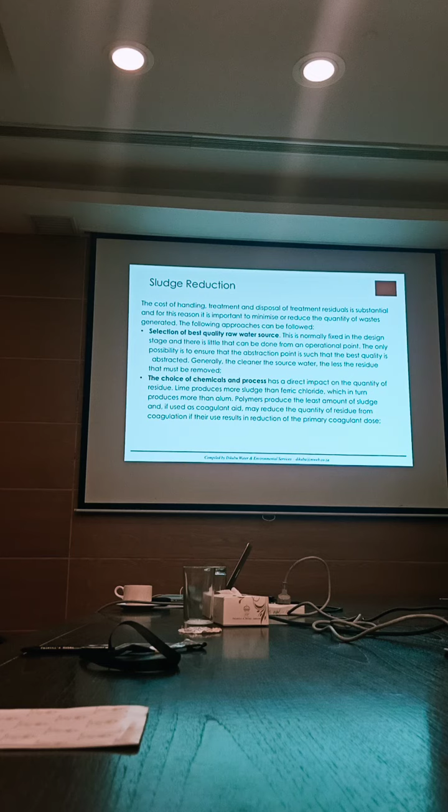Here's our water treatment processes, as many as we need, depending on the quality of the incoming water and the quality required out. So you check the quality of this, the quality of that, then you can select this. That could mean just one block, or it could mean a whole lot of different blocks. Then you start optimizing, saying if this is sedimentation, this is filtration, and let's call this disinfection, just to be standard, and this is flocculation.

What chemical are we adding there? Aluminium and polymer. Do your jar test.

Do we need to add both? It'll depend on this, it'll depend on that. Yes, it's going to depend on cost for that.

So you've seen how it all connects. Your water's got a certain pH, and you need to know what that is - it depends, I can't tell you what it is. Your floc has got a certain pH that it operates in, so that and that have got to be the same. If they're not the same, you must add pH correction. That pH correction is only making sure that this water and this chemical are at the right conditions to be able to work properly together.

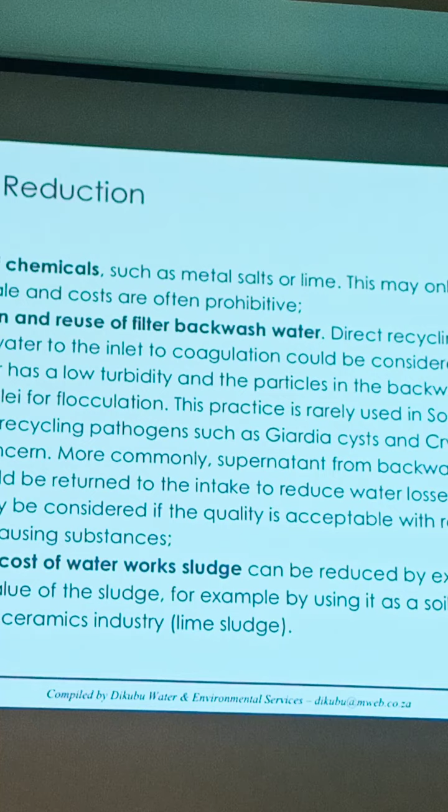Recirculation and reuse of filter backwash water. We can appreciate that some of these processes make a lot of water in their solids disposal - backwash water is a classic example. So let's put that into another settling dam, take the water and put that back into the water recycle, and then concentrate the sludge, taking the water out of the sludge.

I just want to go back to my slides. Don't panic when you see the number of slides, we'll get to them.

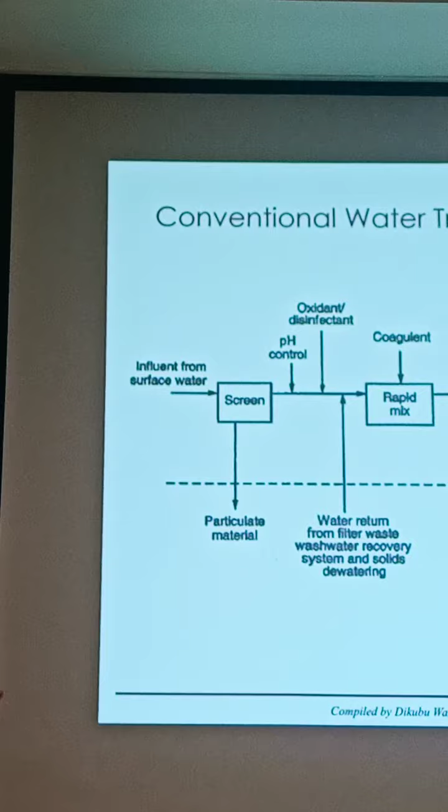So in any water treatment process, you want to consider these: water return from filter waste, wash water recovery system, and solids dewatering. You're not going to throw that water away, you want to put it back into your process. Any filter waste, wash water, under drainage water, solids to dewatering there, that water we must put back into the process. We're going to reduce that.

And that's what you want to do. We want to thicken that up.

And this water, where does it mainly go? Should we put it in the influent, or any process we can put it before the coagulation? So it depends, it's an on-site thing. Why am I saying it depends? Because this water might have coagulant in it already. So be careful. Let's go and do it.

Now you take this water that's got flocculant in it, you squeeze out the water, and you take that water with the flocculant and put it back in here, and you add in flocculant there. Now you might be adding too much flocculant, and therefore your flocculation process is failing. Understand that, so we can reduce that. We are adding in the biological tanks now flocculants, so that might be chemical enhanced precipitation that you're doing in biology. We'll talk about that later.

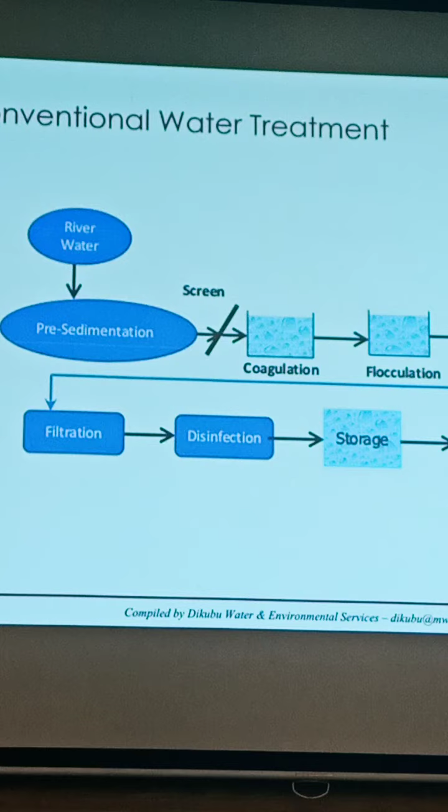There's now pre-sedimentation here, so there might be pre-sedimentation tanks, these ones. Because this underflow has got flocculant in it, put it into here, it will help settling there, and then you have a better quality water coming out of here, which means less chemical added. Or you might want to take that settled water and put it back here, or dewater it and put it back in here, then reduce that as well, because it will have some in it, etc. It's the same with this.

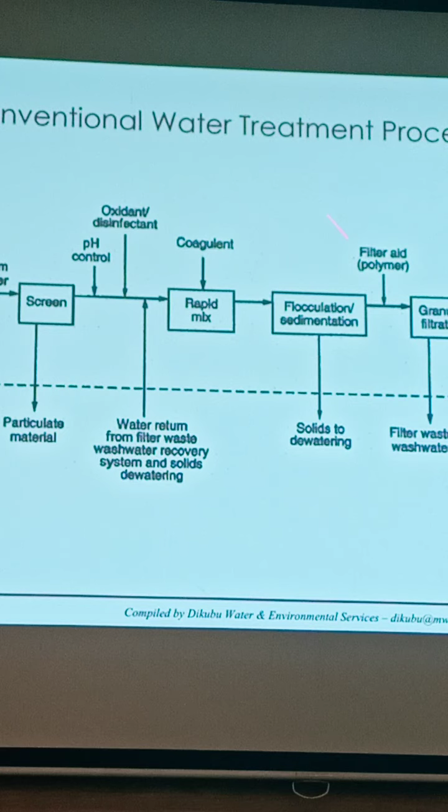Oxidant, disinfectant, what does that mean? We're talking water treatment now. You guys have got me onto water treatment. Ozonation, but what is that for? Is that for disinfection? Because look here, there's disinfection as well. Ozonation, we can use ozone there, we can use chlorine there, we can use UV.

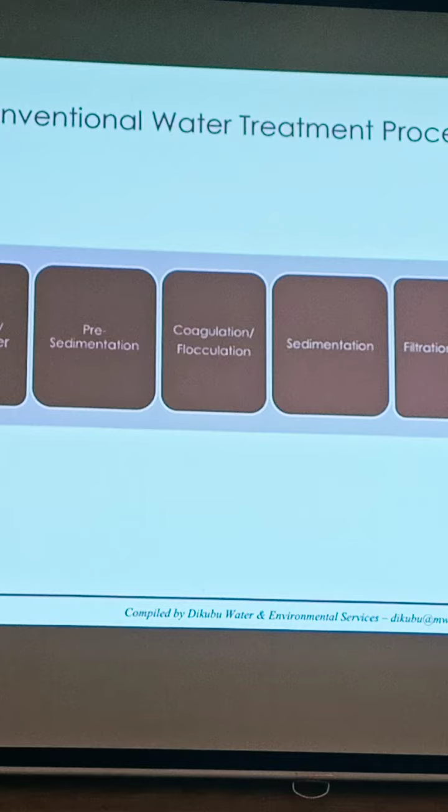Why do we have it here, and why do we have it here? Think about it, give me an answer tomorrow. Because we're not doing water treatment. So we stop, answer that one, we'll go to the next one. Aeration? Yeah, why? Why do you want to aerate? In the equalization tank, we are using aeration after screening.

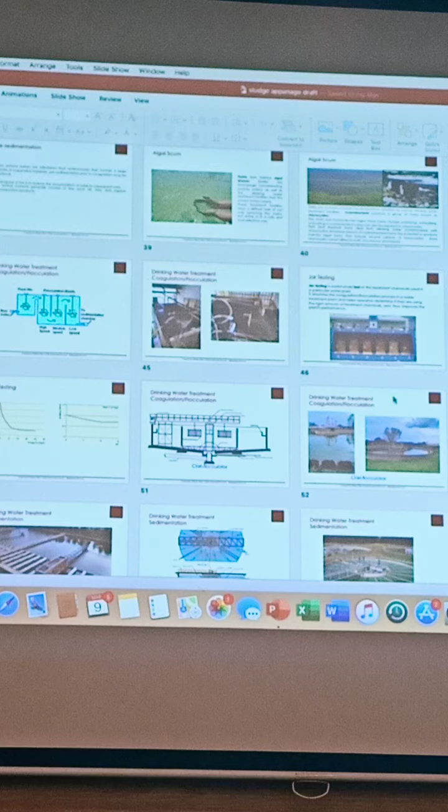You're getting stuck on your biological process. This is not biological process. Okay, but so why on this one?

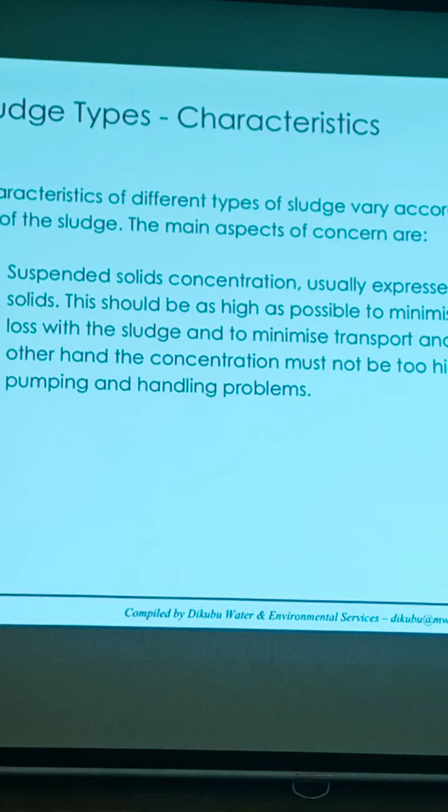Chlorine is used for precipitation of iron. Yes, in the first step we make it insoluble. So now I'll tell you tomorrow, let's carry on, think about it some more.

Obviously, we want to take it to agriculture as one of the best options. In most countries, and Pakistan has got big agriculture as well, what you want to do is support the farmers, or support agriculture with their interface with the soil and crops that they're growing. But we water practitioners, remember, be careful.

Because someone with the same knowledge we've got with water must have the same knowledge with the soil. So we need soil scientists. And then we need someone who understands the crops. Roses against sugarcane against whatever else we grow behave differently, have different uptake of different nutrients and metals. So you need a plant specialist as well. These guys we call agronomists should become quite key in our sector when it starts looking at things like this.

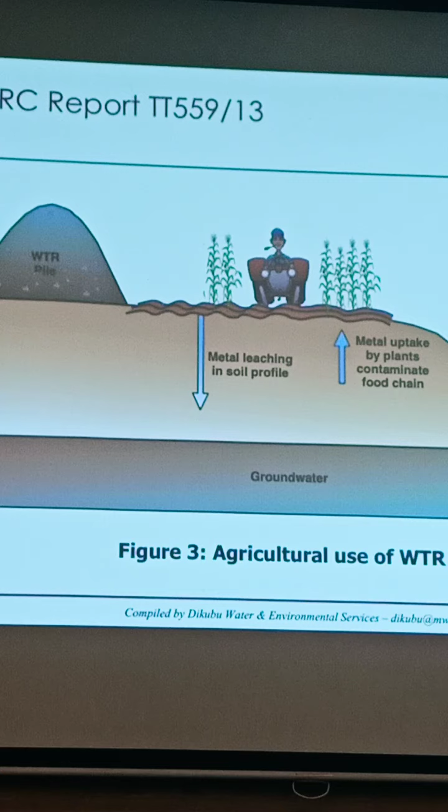So it's not just for farming, for crops. We can go into forestation, where there's growing of forest to get timber, etc. The same concept applies for land reclamation, for landfill sites and mine dumps. Ash dumps might need to be clad as your final process. You can take your sludge, if it's the right quality, and cover your dump.

In South Africa now it's legislation that no mining operation will get a closure unless they've done this. They force the mining operation to excavate the topsoil and stockpile it, then dig their hole in the ground to get to their diamonds or gold or whatever they're after. The material they dig out that's waste, they throw to one side, then they process the rest that's got the ore in it. The material that's now been processed and the ore's been removed is also waste, and those waste piles need to be vegetated before they get closure.

They actually force those companies now to contribute towards a fund, a closure fund. They do the same in our power generation sector, and they should do it in textiles too, but those are still too small, because we're talking big dumps. And there's very little responsibility at the end of the day, so people have been able to walk away from it. It's a big problem.

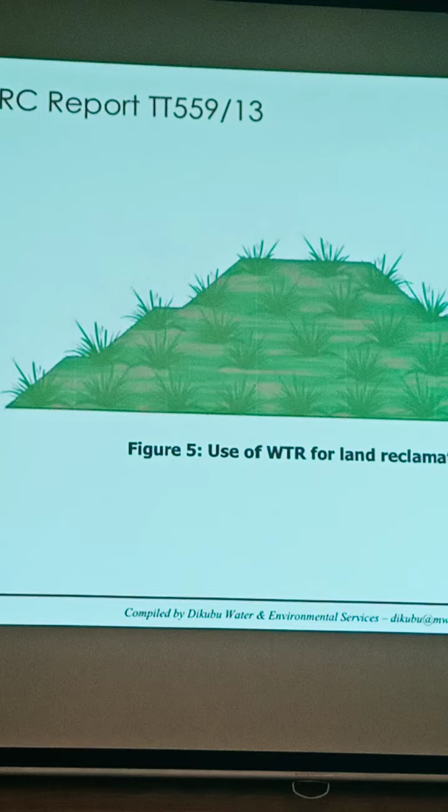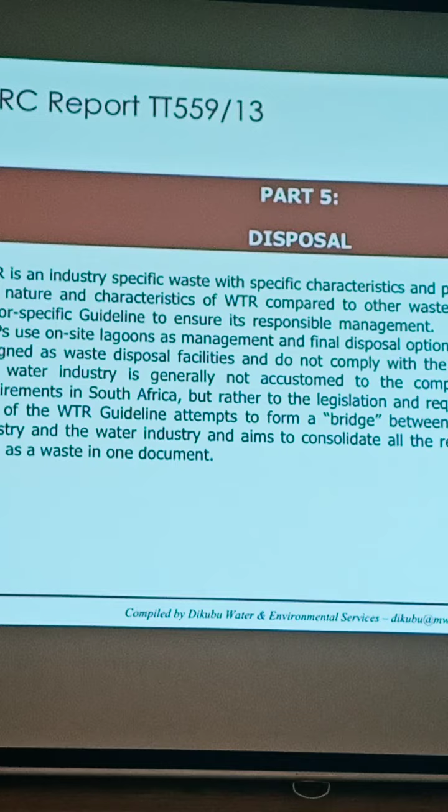Even it's coming to hotels now. Tourists are saying, what are you doing with your waste here at this hotel? And the hotel next door, you're doing that? Okay, we like that, we'll go to that hotel rather. It's fact.

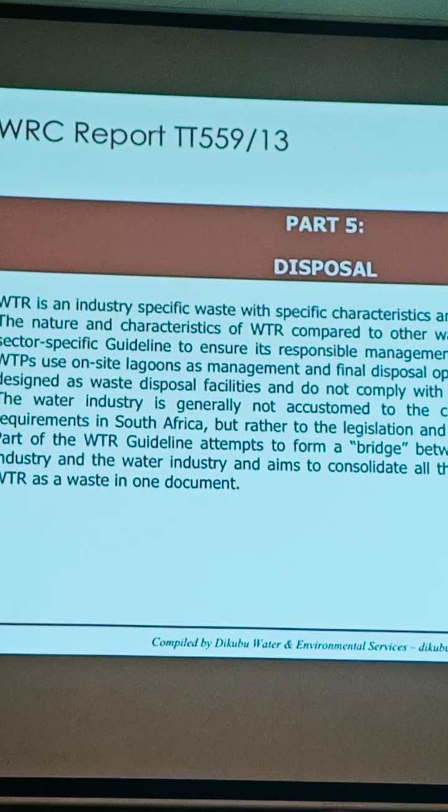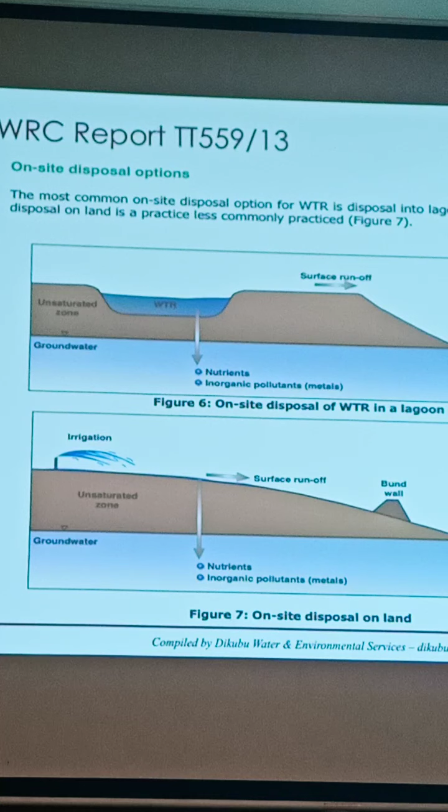And so disposal options need to be addressed. Again, you'll see there's that common underlying theme in terms of the pollution potential, groundwater, surface water, and the requirement to start putting in lining for that, because it starts getting expensive to put in lining as well. So it starts driving you to start reducing the volume of waste that you want to dispose of.

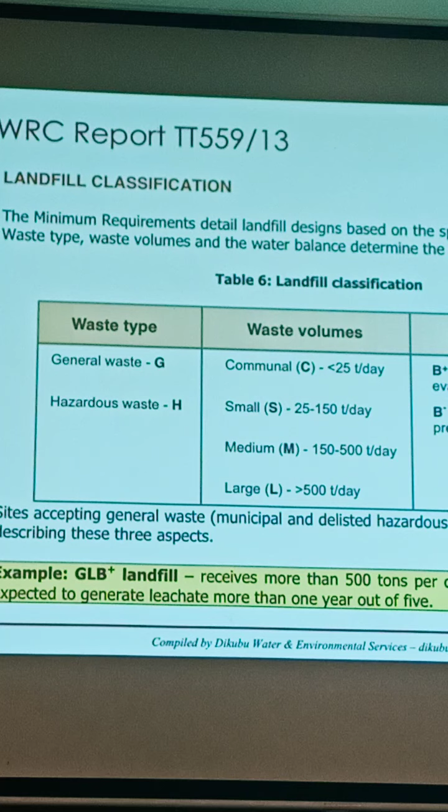Off-site disposal to a landfill, you now need to categorize it - certain types of waste have certain categorizations, and it's fairly consistent all over the world in terms of these broad categories. This is just a reference to some of it. So you would be charged according to what you want to dispose of - if your material has a higher solids content, you'd pay less, etc.

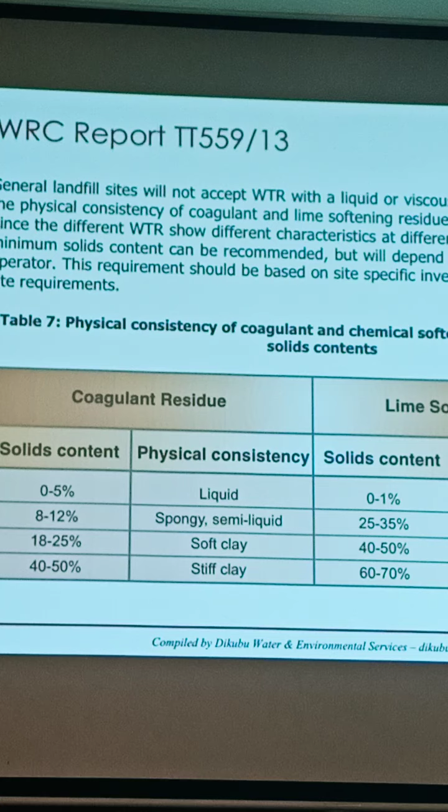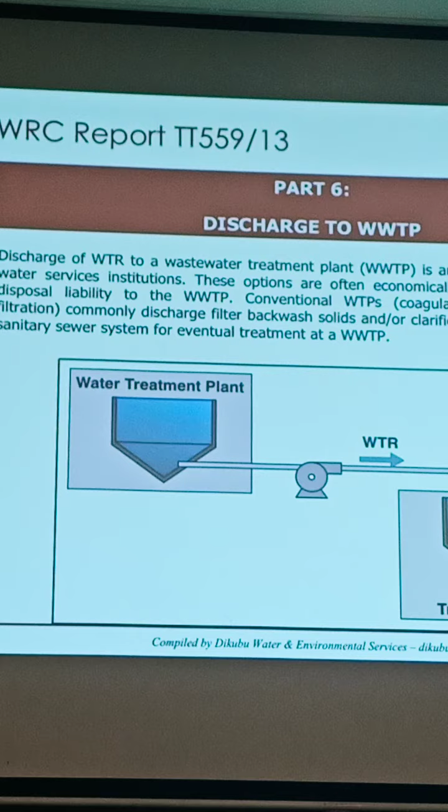So here's an idea: why don't you just take your water treatment sludge and pump it into your wastewater treatment plant? Yes, you can do that, on the basis that the plant operators know you're going to do that and that their system can receive that material. Very often this is a biological treatment process versus a physical-chemical treatment process. You're producing chemical sludge that's inert, and putting it into a process that wants organic material, because that's food for the bacteria. You just occupy volume, so it becomes a big problem. There are things to consider if you want to contemplate that, but you can do it, and in fact it can help with things like removal of phosphorus.

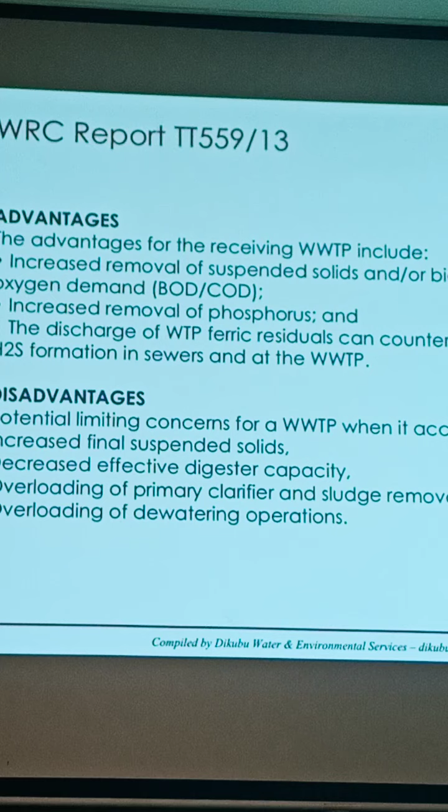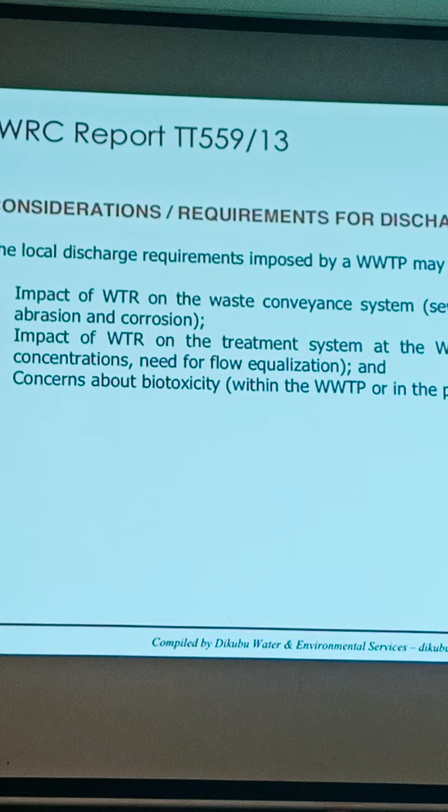We'll talk a bit tomorrow, because you get phosphorus in sludge. You can remove it chemically or biologically, and some of the chemicals from your water treatment plant that come down the drain into a biological treatment process might precipitate your phosphorus out. There should be an agreement in place so both parties understand what they're doing, and then you can go ahead. Biotoxicity is very important, because you can't kill your bugs. You're trying to grow them in your process, so you don't want to put something toxic in there that kills them, because you'll never win.

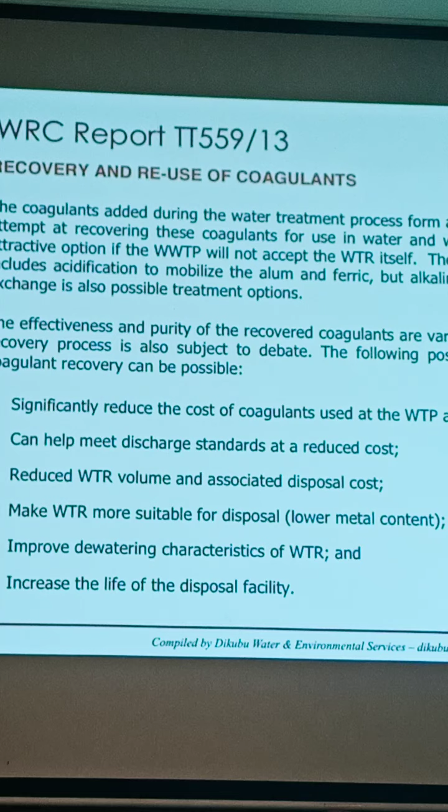Recovery of coagulants - there's work being done on this now, so you can start contemplating that. Again, it's horses for courses: is it affordable for your operation? What's the cost benefit of recovering that material versus buying new material? I can tell you the two are coming closer and closer together, which is going to put pressure on the chemical manufacturers, because they've probably had a good margin. So their margin is going to decrease the more that recovery of coagulant technologies improve and become affordable. So you have a set of obvious benefits associated with that.

Is there any plant in South Africa that is recovering coagulant chemicals? Not yet - we are still too lazy, and we say it's too expensive. But they're crying, because the big ones - that picture I showed you on linear to circular economy, that big sludge, that's a big water treatment plant for Johannesburg - they're producing millions of tons of settled sludge and just throwing it away, or trying to, and now it's becoming too much. The areas that have been throwing it away are filled up, so it's becoming viable from a rands-and-cents or economical point of view. But no, we're not doing it yet. I think some of the brine discussion we'll have just now will give us more insight into what you can start doing with it.

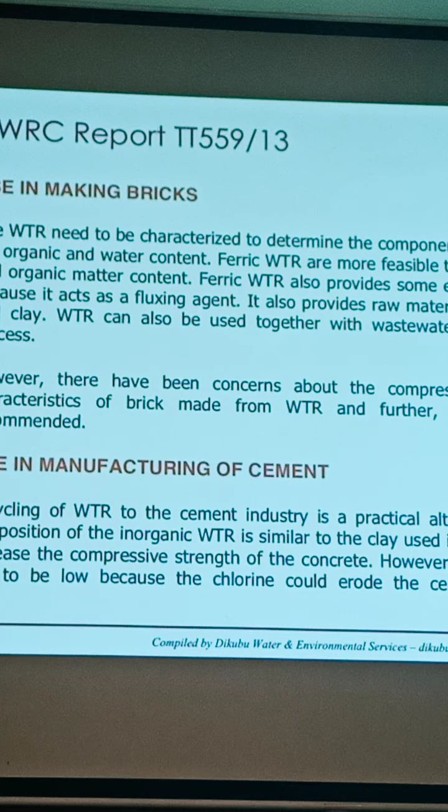We can make bricks - you guys are making bricks. Good. Just remember, you should check there's no toxicity in the sludge, so that when you give the bricks out they're safe - they don't start glowing at night and things like that. Also make sure they've got the characteristics for strength in the brick-making process; often that's not looked at. You need compression strength, and when you bake it, it's got to reach a certain strength. So you mix it normally with cement to make bricks - the cement industry provides adhesive in this. From a biological sludge point of view it's even better, because the fibrous content in the sludge helps it to bind, so it makes them really strong normally.

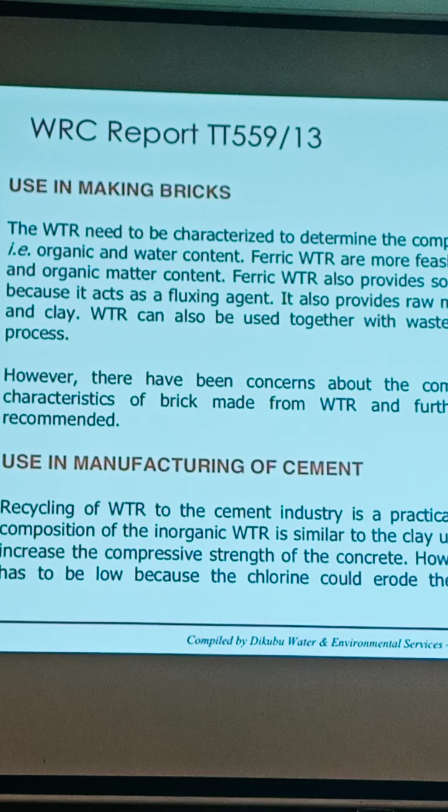Okay, so you can burn it, turn it into an additive for cement, dry it out completely. For rehabilitation - yeah, when we burn it, it's very smelly for the biological sludge, the activated sludge. So again it's a balance: what is our emissions requirement? What is the cost to abate the emission? What is the cost for the incineration? What temperature must we burn it at? What is left in the ash?

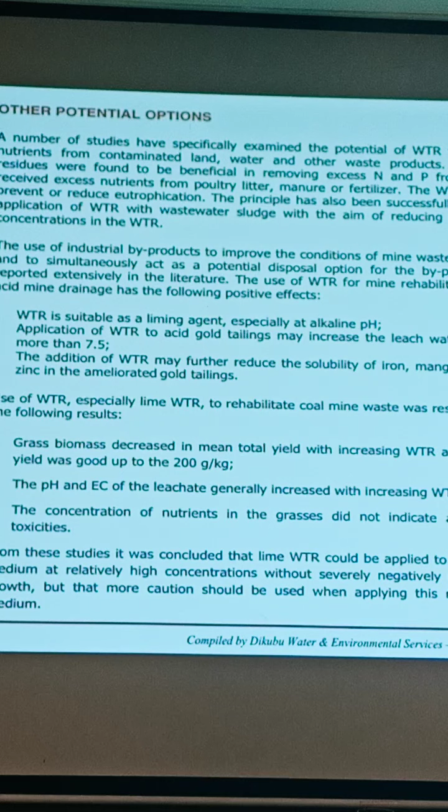Activated sludge has many bacteria in it, but if you burn them, they're gone, that's for sure, so the bacteria isn't a problem. But it's the metals - what temperature must you burn to get rid of certain elements, and what's left in the ash? There are obviously a lot of toxic elements in it, especially for our tannery.

Okay, so that was conventional water treatment: flocculation, coagulation, sedimentation, filtration.

Do you want a quick 2-minute, 5-minute leg stretch, some fresh air? Sure, because I think we're going to target finishing for lunch. What time do you want to finish? Let me just check - these guys, what time? Because we'll stop for an hour.